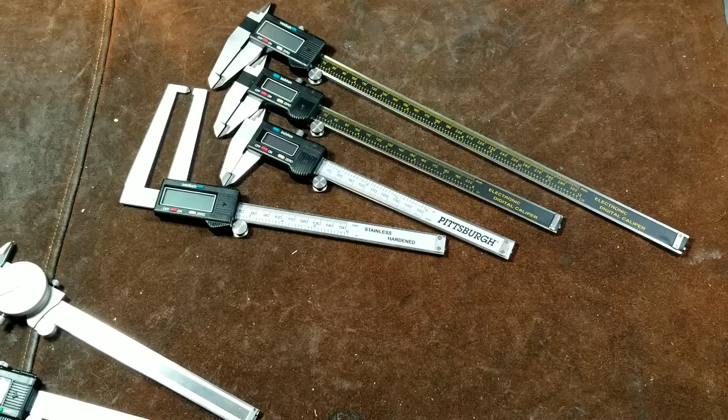Caddis Maximus here, this time with a review of the Harbor Freight digital calipers. These are the 6, the 8, the 12-inch, and then of course the long reach brake digital calipers. I built these up over a few years.

Harbor Freight's actually been selling these units for a long time, 5 to 10 years. They are all still available on the website. As evidence of how long they've been selling them, Harbor Freight has 7 or 8 6-inch digital calipers on their website, of which there's only 3 actual units. They have so many duplicates. Like with the digital calipers, they actually have it listed 3 times with the same photo and description with 3 different part numbers. But they're all still available.

They are a bit more expensive. I think when I bought these 12-inch several years ago with a coupon, they were like $35. I was noticing that they've gone up to $50.

These are obviously not the best dial caliper or digital calipers, but they do work, and there's a couple of caveats. There's been a lot of debate. I've worked in a machine shop, and there's obviously a ton of debate about these. No, they're not Starretts or Mitutoyos or any other kind of real higher quality unit, but if you use them properly and keep them properly adjusted, they're not grossly inaccurate either. And for the price, they're hard to beat.

The machinist and precision measuring tools, the prices just start skyrocketing, well over $100 when you start getting real expensive ones. Even companies like Starrett now have their sub and above $100 tools.

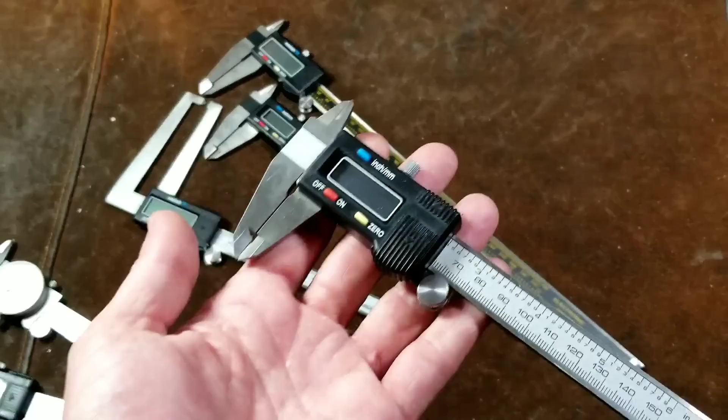So the older ones have these black backgrounds and the newer ones have these silver backgrounds. I believe both the 8 and the 12 now include silver backgrounds. If I may be incorrect, these are just basic. Whoever makes these, this is like a common design. So you'll see that there's a bunch of different knockoff brands that all look exactly the same. They all have a simple battery port, which is pretty easy to access.

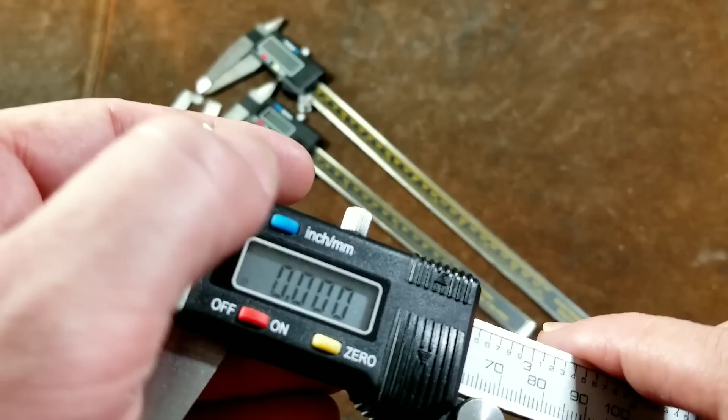They, of course, being digital, they both read metric and Imperial just through a press of the button. And the standard 0 - these are incremental only, meaning when you turn them on and off, they're always at 0 wherever they're sitting at. It doesn't know exactly where the head is sitting on this bar.

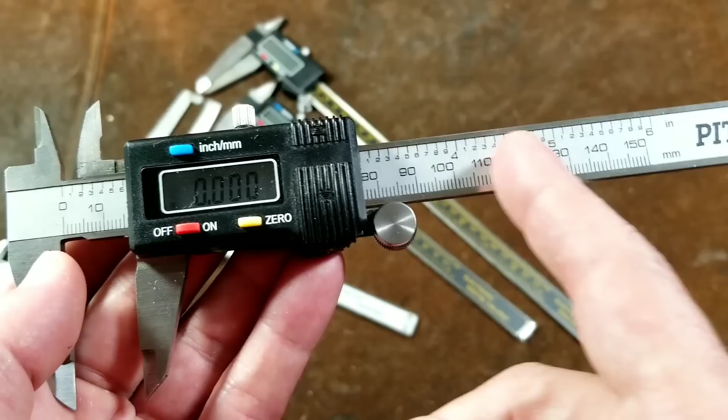How this works is there's a bunch of little lines. They're not printed, they're like magnetic, I believe. And on absolute ones, those lines actually, the spacing slightly progresses down, so the head knows exactly where it's at. These, it's all even. So whenever you turn this on, if you want to measure something, you have to turn it on, you have to run it down to the bottom, and you have to zero it out.

And what I mean by that is, say on these KD, these are some Napa ones, these are just a little bit more expensive. These do have a larger screen. The 8-inch and the 6-inch Harbor Freight calipers do have small screens, where the 12-inch and the brake calipers actually have large screens. So I did like that quite a bit.

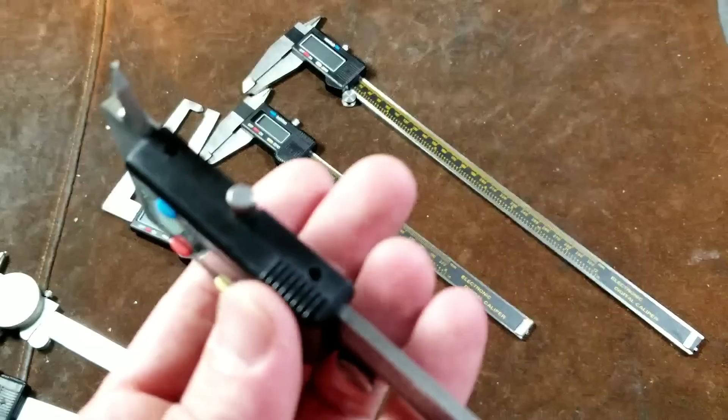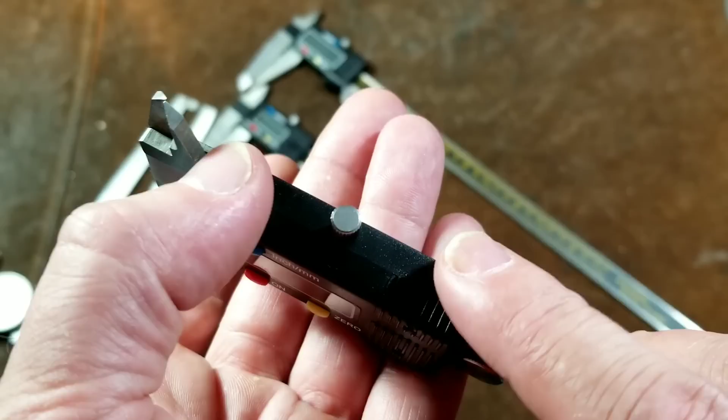And actually, before I forget, all these, I'm not exactly sure, have these little adapter boards that I'm not sure if that's for testing, but that seems to be common with it, or if it's for like a digital readout. I suspect it may be for some kind of external readout. And of course, 2 adjustment screws. These are always little tiny slot heads. There's like a little brass shim that these screws press against, and that's how you adjust the head.

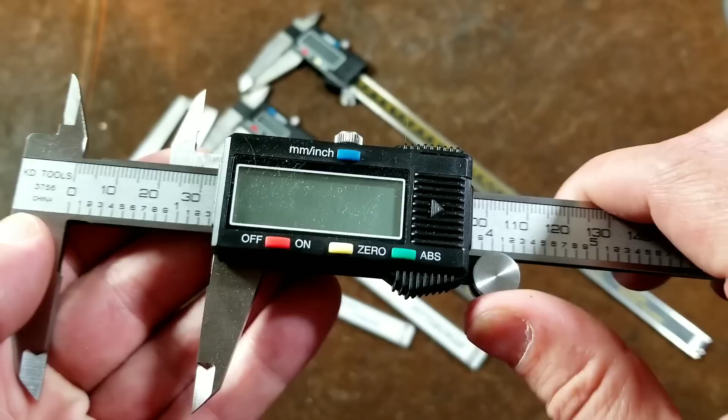Now, if we were comparing to absolute calipers like these KDs, what's interesting is I can be at any position. I can turn it on, and it will show me the absolute position. I can switch it to incremental, and it'll just turn on and be 0, just like the Harbor Freight. But the difference of this one is I can turn it off, run it way up here, turn it back on, and it knows how far I've moved it exactly.

And so that's one feature that will set apart a slightly more expensive digital caliper, is the fact that it will be absolute as well as incremental. And those do help with accuracy and prevent mistakes, because when they're absolute, they're always zeroed even when you turn them on and off. So if you forget to run it down and re-zero it, it's not the end of the world. And so that's the big selling point of an absolute.

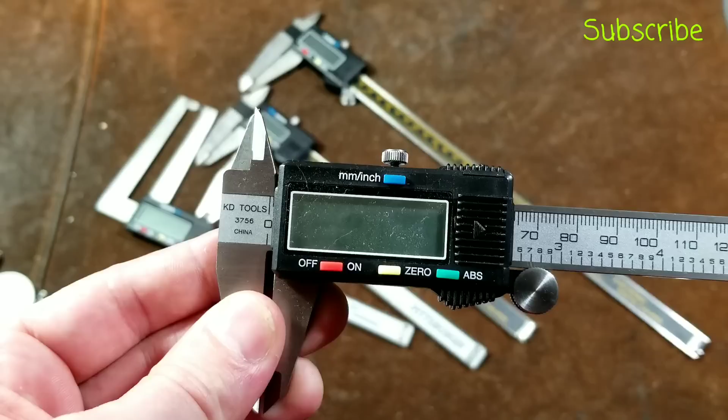Let's take a look at these brake calipers. These have all been pretty smooth and had pretty even beams, not bent. Sometimes they've been a little gritty, but I recommend buying these in the store if at all possible. With Harbor Freight and 800 stores, there shouldn't be one that far away.

Because when you buy them online, you're kind of stuck at the mercy of less than great quality control. But in the store, you can go through a couple of boxes and find one that's not so gritty, or that seems to be the really nicely made unit. And that's what I did with these, because I'll admit, some of them didn't clean them very well after machining, and you can really feel the grit.

The one thing I'll say about these long reach brake disc calipers is they're more than useful for brake discs. There's all sorts of situations where I needed to reach around some object and get a nice measurement on a couple of points, and that gives these a huge advantage. These types from professional brands are really expensive, $200 to $300 is what I've seen online.

The one thing I will mention about these, and they all seem to have that same issue, is whenever they were machining them, there's some kind of issue where it's just a little bit thicker right at the end. I've always had problems with it being really tight right about the last quarter inch or so, but they do slowly wear and break in.

Now, what I mean by keeping them properly adjusted is all you have to do is take any kind of calipers, mechanical or otherwise, and just try to wobble the moving jaw back and forth. If you feel it wobbling, you'll just need to put in a screwdriver and adjust the tension to the point where it's fairly stiff.

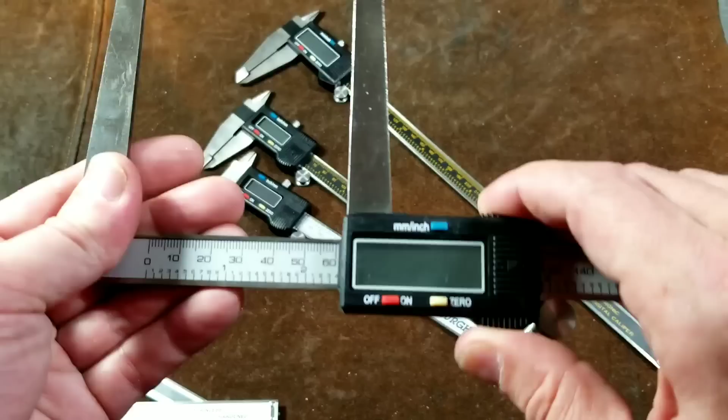When you get calipers, they're not actually supposed to just be super easy to move back and forth. They're supposed to have a fair amount of friction so that when you're doing your measurement, it doesn't want to move around so easily. If you reposition your hand, you can feel it, and it gives you a more solid measurement because of that friction.

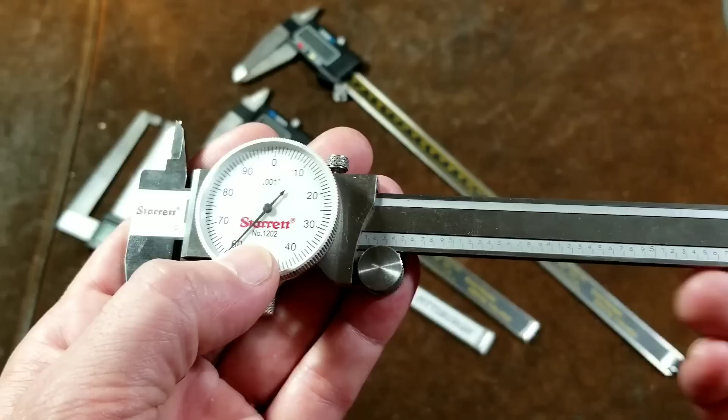You might be curious about that, but if you ever buy something like Mitutoyo's or Starrett's, particularly dial type, like this pair of Starrett - this is not an American-made Starrett, this is what would be considered their more budget conscious line, but even these are still really nice - when you get them from the factory, they actually have a fair amount of resistance. It's really pretty surprising, but you get really reliable measurements that way.

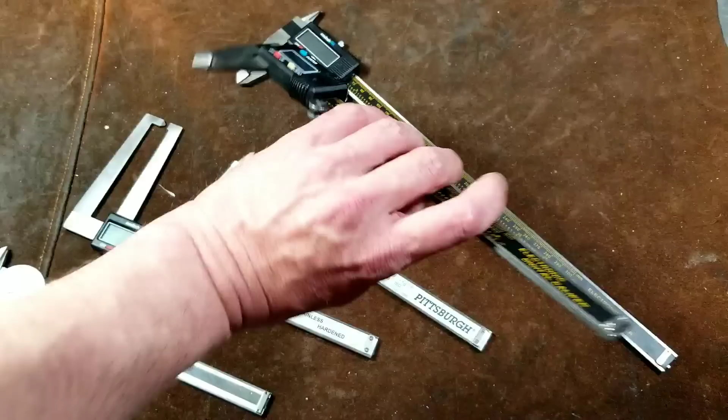Once you start realizing what the real professional grade ones do, you will just adjust the Harbor Freights accordingly, where you'd say, wow, it's pretty loose just by moving it by hand. I'm going to tighten both these screws up until I don't feel any wobble in the jaw, and I have a nice amount of friction. I did want to really emphasize that, and you'll have much more quality measurements.

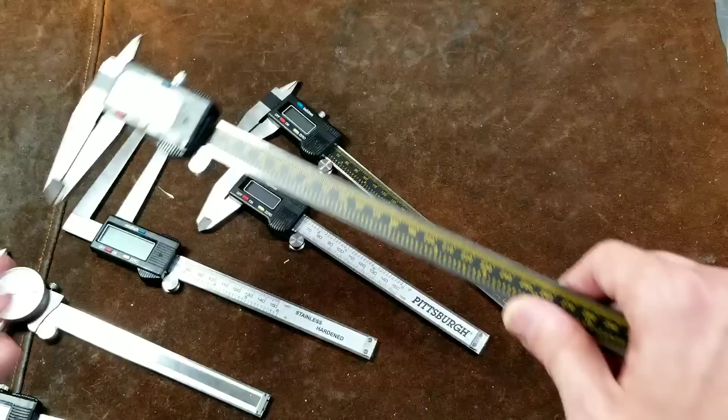I've seen a lot of complaints about this one, and this one's been just great for me. I just make sure it's adjusted and has a good amount of tension on it. I've compared it against stacks of gauge blocks after repeated uses, and it definitely works. I do have some gauge blocks, but I didn't want to bring them out for just these review purposes to prove that they measure properly. You just have to be meticulous and have good technique and properly adjusted tools.

Otherwise, if you use the coupons and the Inside Track Club, you can probably get all 4 of these for like $100. Then you have a nice variety of measuring tools. You have a 6-inch, which would be general use, so you wouldn't have to worry so much if you dropped it or got it a little banged up. And then the larger ones are really invaluable in many situations. The fact that they're just phenomenally expensive pretty much from anywhere else besides Harbor Freight or online ordering of other cheap equivalents, so for me, they're generally recommended.

They've performed as expected, and for their price, you really can't complain very much at all. I guess my biggest gripe would be, it would be nicer if they also were absolute. Then you would have more reliable measurements over the long duration of time. That way, when you're zeroing these out, if you have a piece of grit on the jaws or something, absolute calipers are less susceptible to errors because of that.

I guess that's all I really had to say. This was just a basic review and a video just to kind of dispel some of the myths about the horribly inaccurate Harbor Freight digital calipers.